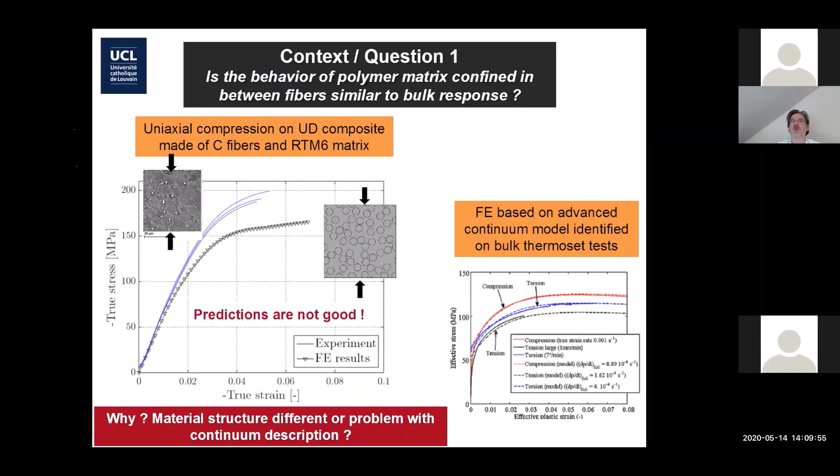The other option is that a continuum model with a classical form is not rich enough to capture the plastic behavior. We're talking about elastoplastic behavior here, and it's not rich enough to capture the detailed flow field at that length scale, in volumes on the order of a few micrometer size. Similar to what we have in metals, by the way, where people develop strain gradient plasticity theory, etc. So two possibilities, and that's one motivation for today.

The second motivation, and for those of you working in the field of modeling polymers, you have seen many papers over the years, starting with the work of Mary Boyce, Eric van der Giessen, Lallit Anand, etc., doing excellent work, relying on empirical phenomenological models but also rooted in some micromechanical analysis and the Argon idea, etc. Over the years the models have been improved and enhanced, and they're doing a very good job. If you read the more recent ones, they can predict a lot of stress states at different temperatures, even sometimes below and above Tg, but at the expense of a very large number of parameters, at least 25 or more.

And this has to do with the complexity of the response of typical thermoplastics and thermosets. Even though I will talk about thermosets, most of what I discuss today is valid for thermoplastics. As you know, a polymer starts with a linear elastic response, then non-linear elastic, then plasticity starting, and we never know exactly where. It's not easy to decide where there is true plasticity, and even the notion of true plasticity is not totally appropriate in polymers. We have to define plasticity with respect to a certain time scale.

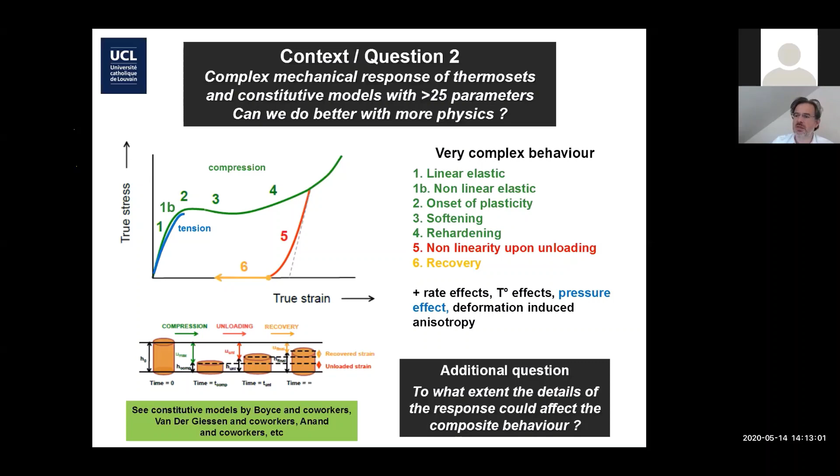People have been looking at that for a long time, but we don't see evidence of advanced micromechanical studies of the phenomena of fracture in thermosets compared to the level of understanding in metals - really fine, low-scale understanding of what causes initiation of fracture and what are the detailed mechanisms. I want to say a few words today about that.

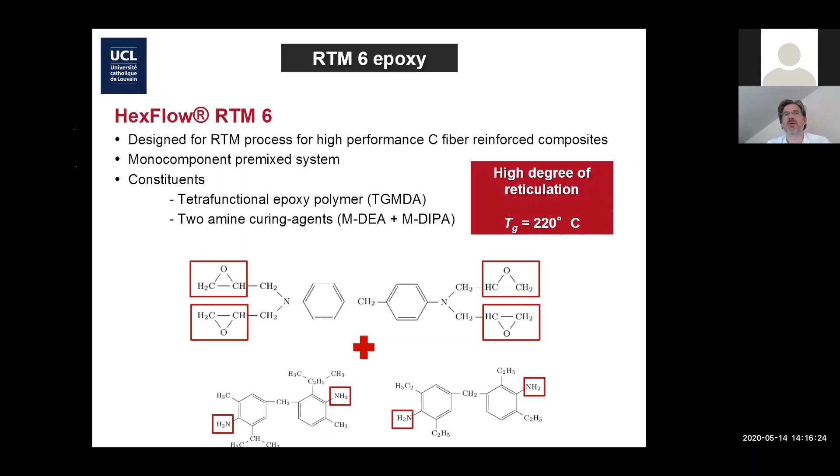In order to apply mechanical models and do micromechanics on the RTM6, of course, we need to produce clean samples. And it's not that easy to produce bulk specimens that are very clean, without porosity, fully cured, no burning, etc.

So it took some time, especially for Xavier Morel, to be able to produce big slabs of material from which we can extract decent size fracture mechanics samples - notch test samples, tensile bars, compression, traction, torsion, shear, Iosipescu type specimens. That was quite a work to define the best curing schedule for that.

By the way, many of the tests I will show today are coming from compression, and I will show a few results on composites, compression of UD composite as well. Compression is nice because this material is not very ductile, and if you want to address the large deformation behavior, you can only reach it in compression.

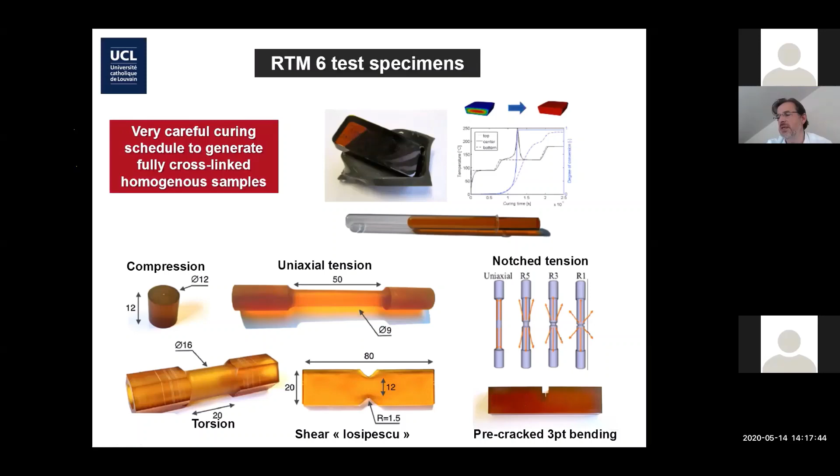So by the way, at room temperature, for the metal people in the audience, it's good to realize that the yield stress of these materials is above 100 megapascals. Compared to a typical aluminium alloy, not the best one, we're not far off. So yield stress is large. Of course, the Young's modulus is close to 3 gigapascal, which is way lower.

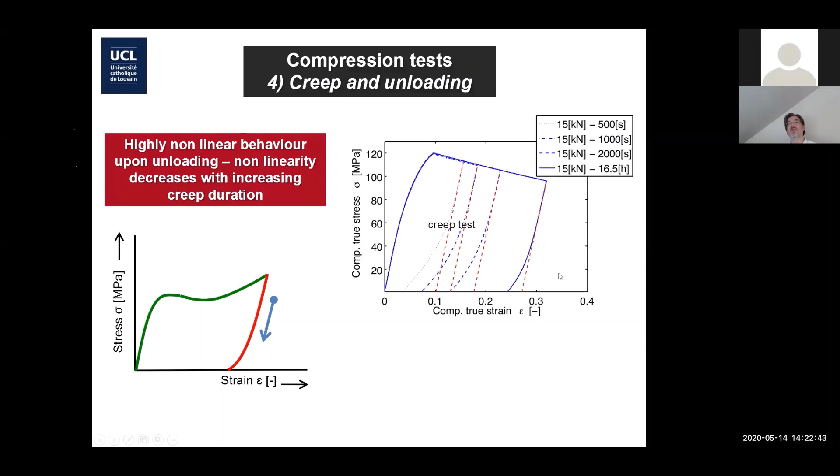Now we're going to let it creep longer, and again unload, and look at the unloading curve. Immediately what you see is that the amount of nonlinearity upon unloading is much lower when you let it creep long. So it's like if by letting the material relax by creep, you do something - we will explain that later - that lets the material stabilize in such a way that during unloading you have less Bauschinger effect, if you want, which will be related later to backstress.

Another very interesting experiment - by the way, we thought that was a really recent thing. We found only a few papers showing this experiment, and then someone came with an old paper, I don't remember, from the 60s or 70s, showing this. So this is not new, and of course a lot of good things have been done in the past. It's also called the Kohlrausch effect, what I will explain here.

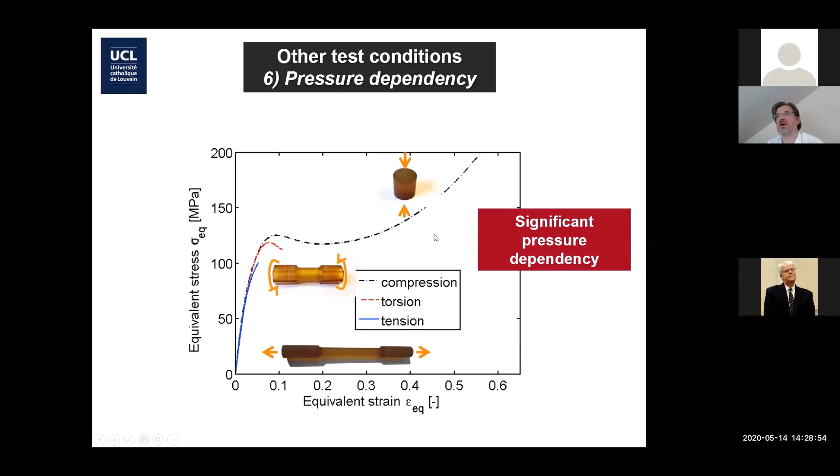Now, typical results known for a very long time on polymers is the effect of the stress state that is applied on the plasticity. So you get a compression curve here, a torsion, and a tensile test. Unfortunately, the tensile test breaks before getting full plasticity, but you clearly see that there is an effect of pressure dependency, which is well known.

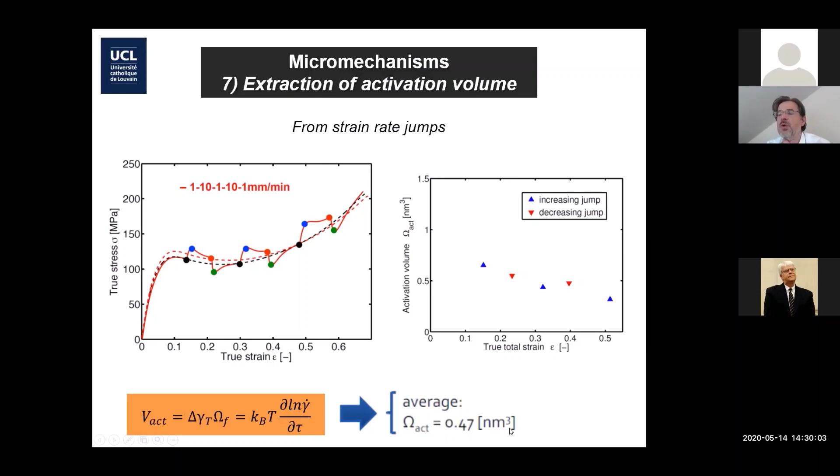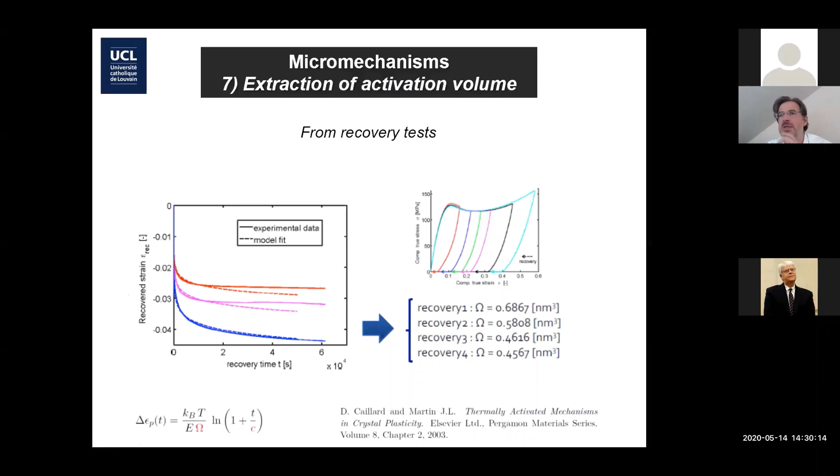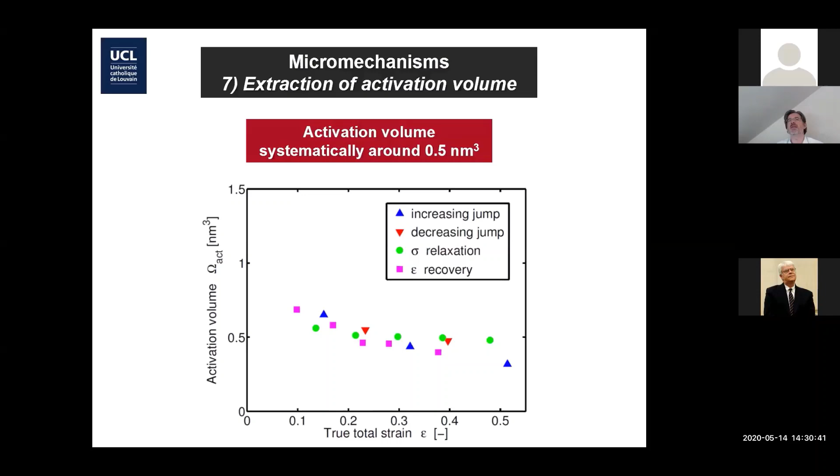There are other ways to measure this quantity through relaxation tests and recovery tests. You have to make some assumptions, but I'll skip that for the sake of time. At the end of the day, when we combine the jump test, relaxation test, recovery test, and perform that at different true total strain, the activation volume we measure changes a little bit with strain, but not very significantly, and is always about 0.5 nanometer cubed, which means there is a phenomenon taking place at that length scale triggering the permanent deformation of the material.

And a final experimental result I'd like to show is the following. These are now tests on composites with aligned fibers - a compression test on a UD composite. The reason I'm showing it is not to look at this nice fracture event, that's not my purpose. The purpose is that we very distinctly see a shear banding process.

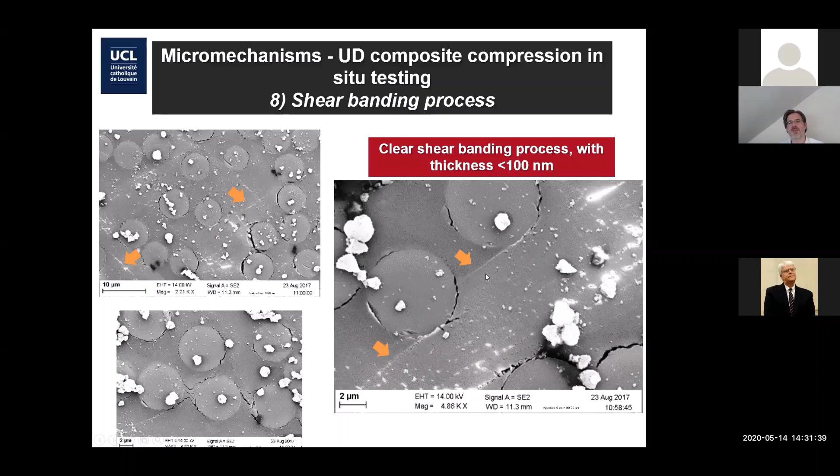You see, and there are many examples of nice shear bands that are observed and which later develop into a damage localization, but at the beginning it's a very distinct shear banding process. We see it very well in this composite configuration. Typical thickness is way below 100 nanometers, but we cannot measure accurately.

There is definitely a shear banding process. So let's go to modeling now. The first thing we did, with Xavier Morelle in his thesis, was to look at available empirical and phenomenological models in order to use this for composites. So then, to make the simulation I mentioned at the beginning, we simulate a UD composite with a nice constitutive model for the matrix and the fibers, turn the crank, and get good predictions. And you know the story - we're not getting very good predictions.

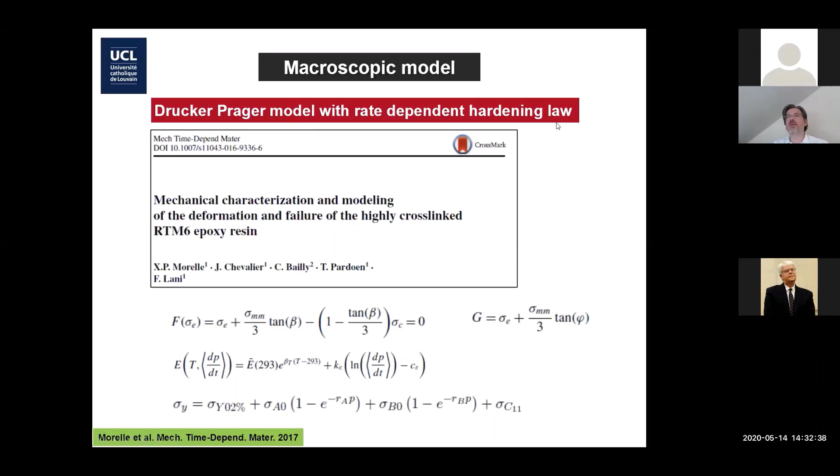So we decided to take a model with an intermediate level of complexity, using Abaqus. We use Drucker-Prager with a rate-dependent hardening law - I'm skipping the details - with 28 parameters. This is typical cost for these types of models, where based on these 28 parameters, you can predict different temperatures, different rates, tension, compression, torsion, and a few more things. These are the 28 parameters.

But we are not able to capture the complicated effect during unloading. We would probably need 10 more parameters for that. So that was the time.

And at that time, we also started working on metallic glasses, a completely different subject. We looked at the literature there, and we read papers by the group of Chris Schuh on metallic glasses, where they use the so-called STZ model, shear transformation zone based model, to represent the behavior of metallic glasses, showing a very good trade-off between complexity and accuracy, or capacity to predict the different phenomena they were observing in metallic glasses.

And we had the idea to say, well, probably in our thermosets, based on what we read from MD simulations also, we could probably use the same formalism. This formalism comes from Ali Argon, who unfortunately passed away a few months ago. In his mind, the idea is that this STZ approach is generic, even for dislocations, or for polymers, or metallic glass. So we decided to look at the work of Chris Schuh and apply it, and see what we should do to convert and modify it to apply to polymers.

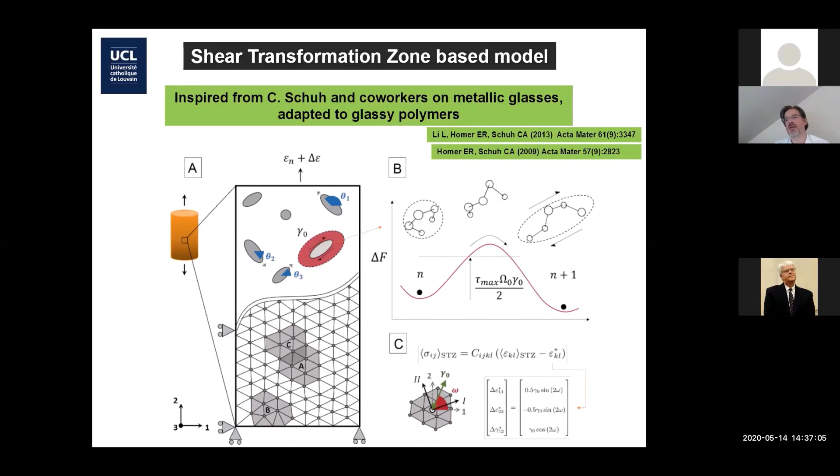A few words about the formalism. The rate of activation of a shear transformation zone is given by this expression, and its derivation you can just follow from transition state theory. The rate of activation depends on the energy barrier, which is reduced by the mechanical driving force you bring if you impose a shear, and this shear will work through the transformation strain over a volume, which is the activation volume I defined earlier.

Now there's a little bit of subtlety. What we found experimentally is not gamma zero. If you take the derivatives, etc., what you find experimentally is the strain multiplied by the true activation volume. But you get the idea.

So there is a certain activation rate, which of course will depend on temperature — higher temperature means higher probability of jumping over the barrier — and this probability also increases if your mechanical driving force increases, meaning if the stress is larger. The probability of activation is the activation rate multiplied by the time increment over which you're looking.

We use a kinetic Monte Carlo algorithm where you generate a random number between 0 and 1, and if this probability is lower than your random number, the STZ is activated. The question is, what is the form of the energy barrier? We just borrow what Argon proposed, and that's what Schuh is also doing.

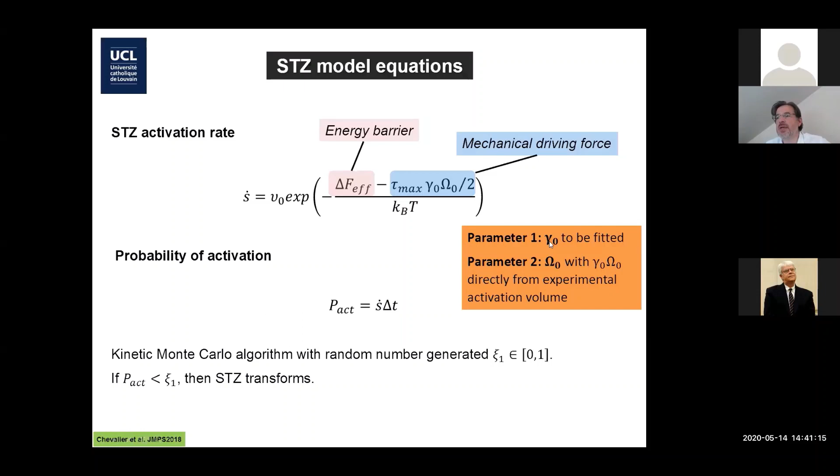So by the way, there are 9 parameters: a shear transformation strain, an activation volume that we can measure experimentally, Young's modulus we can measure, Poisson ratio we can measure, intermolecular resistance - it has a physical meaning, but basically you will need to adjust this value.

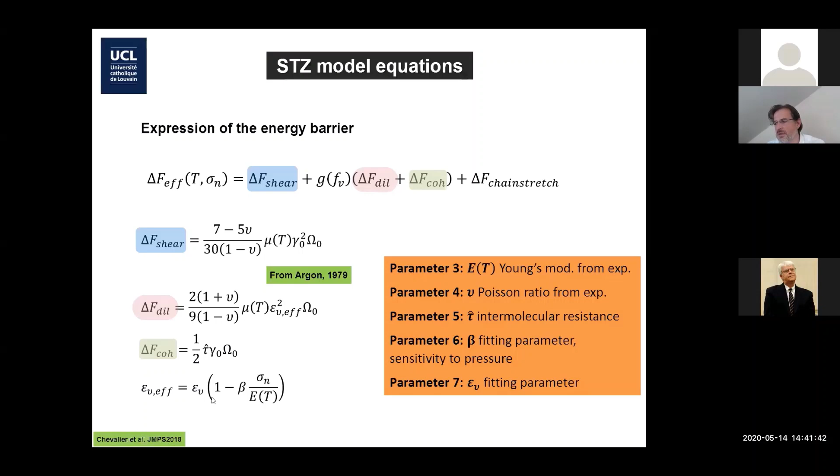A fitting parameter taking into account pressure effect, a fitting parameter connected to the dilatation occurring during a transformation, a fitting parameter related to the annihilation of free volume - but that's not very important - and a parameter to adjust for the chain alignment. So 9 parameters, 3 or 4 of them can be obtained directly from direct measurements.

Okay, so these are some simulations when you just turn the crank, and it seems easy, but there are some subtleties, and Frederick, for the time being, is really spending time trying to regularize some effect of time stepping, etc. So I think now we have a fairly reliable code and version that converges if we decrease the time step, etc.

You see nicely, and the little dots you see - this is maximum principal strain plotted here - and you see the transformation starts, a few STZ, then they trigger some patterns which directly you see are organized under maximum shear.

Now, the goal was to go beyond developing the model. This was to get a qualitative result. We really wanted to push the game to really identify the parameters and make direct comparison to our macroscopic experiments.

So in order to do that, these are the stress strain curves. Here, the experiments are in red, and the model predictions are the dotted lines. When you see me looking like this, it's because I have my camera in the middle of the screen.

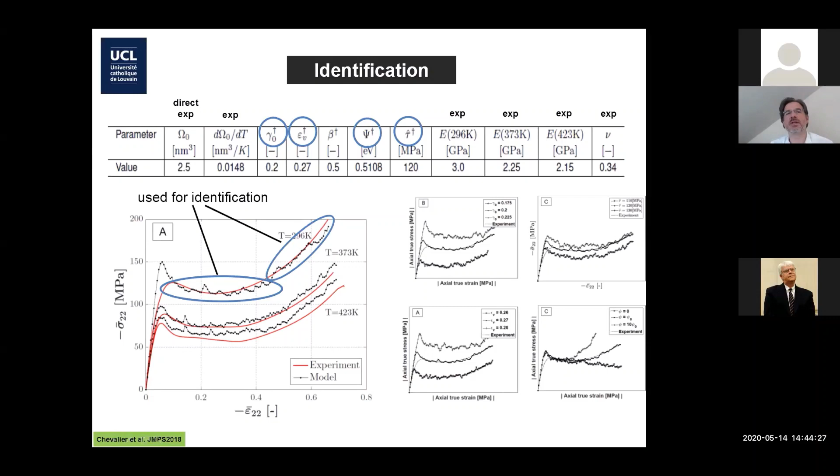So this is just a larger picture where you see the predictions. Okay, you may say that's okay - it's the minimum we expect from a viscoplastic model for polymers, to capture the temperature.

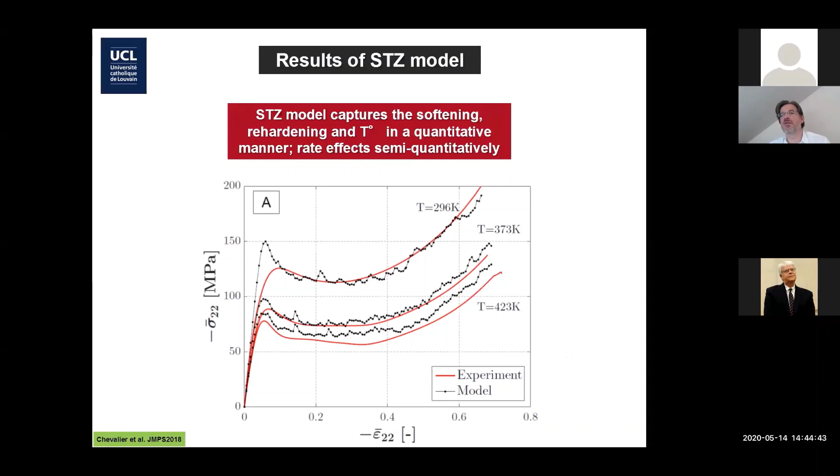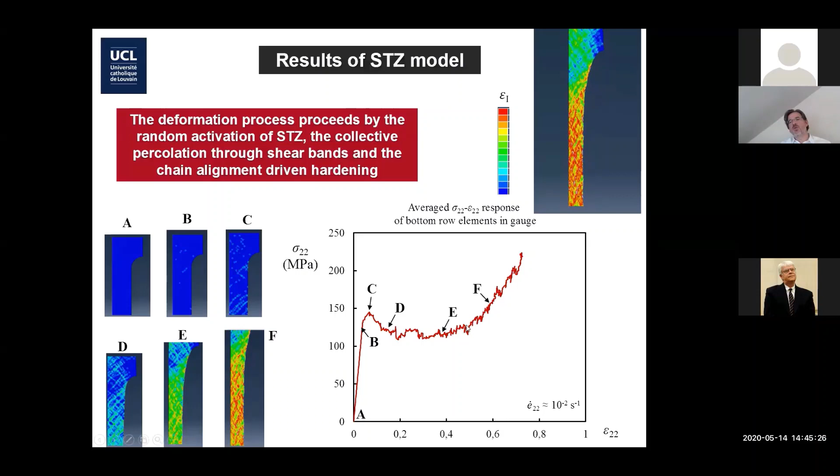These are some more snapshots taken at different deformation steps. This is tension, just to show you that at B here, we start having the first activations below the peak, and the peak stress is when we start percolating some pattern of shear bands, a collective behavior of some STZ, now creating plasticity which go at the macro scale. During the softening, that's when this pattern develops into the entire specimen, and the rehardening starts after 40%.

This is the compression test. It's exactly the same idea. I will skip this one.

Very important messages here, and it's confirmed by MD simulations. Qualitatively, we compared, we looked at some papers in the literature, and MD shows this kind of thing.

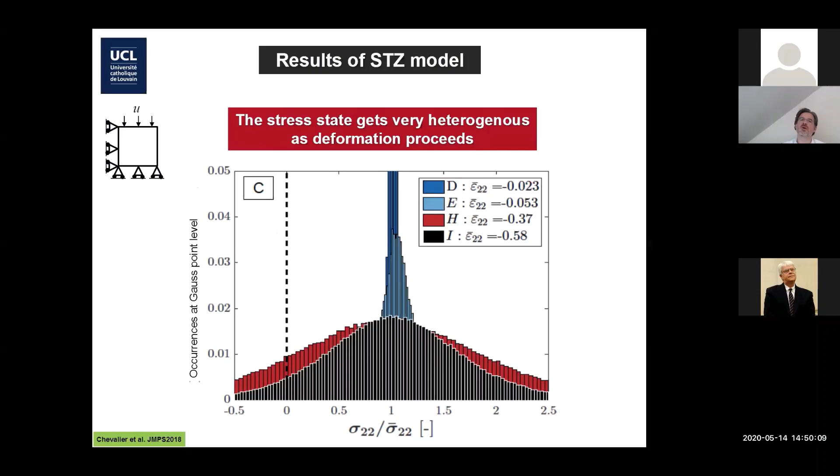Just the fact that when you unload, even under loading, you're already getting regions that are undergoing tension. So as soon as you're unloading, these regions get more and more in tension. They reach the peak stress in tension and start activating plasticity in the reverse direction. And when this mechanism has been exhausted, your stress is still positive, so you get the forward creep.

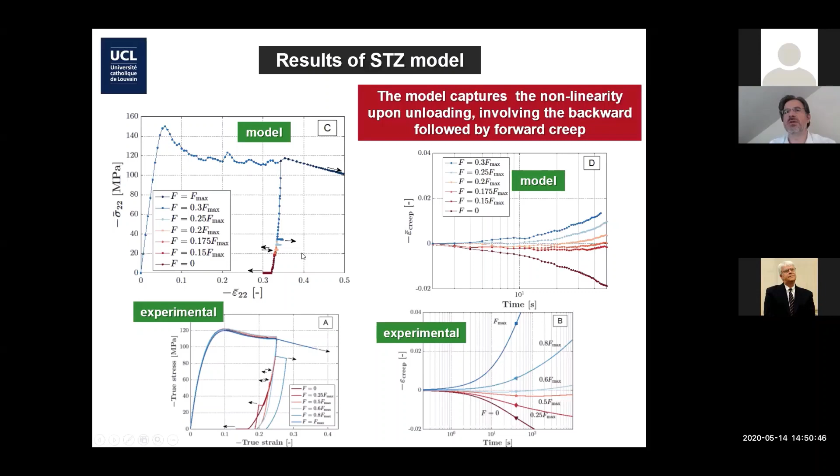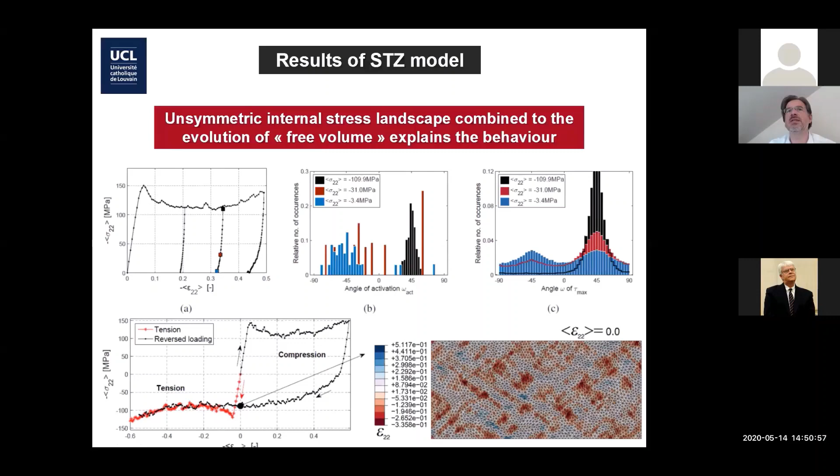This is explained in more detail on this slide, but I will skip it. This is the idea though: it has all to do with the back stress effect. There is nothing else to explain this phenomenon. It is all related to the stress heterogeneities that are created.

So now, just yes. We have 5 more minutes. Is that okay? Yes, sure, thanks. I'm done with this part, and I will just say a few words about fracture, to give people the envy to have a look at the papers. But sure, no, I will respect the time, don't worry. And you know what, I told you my grandmother is turning 100 years old today, so just after the seminar I'm going to go say hi. So I've also reason not to extend it too long.

With the beta parameter, you can introduce pressure effect, but that's not a big deal.

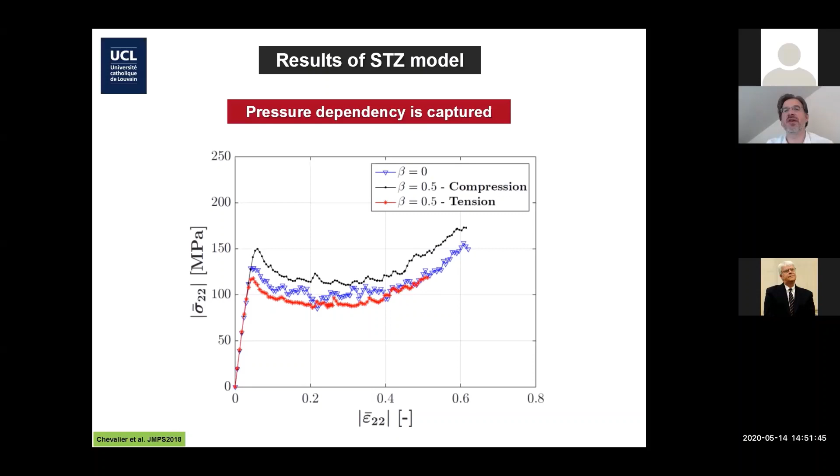The negative message is that we are not seeing much strengthening coming from this model when it's confined in small volumes. As a matter of fact, we don't get, like in these locations, far field long range effects which accumulate and which can create the strengthening. So there's still something to understand there. And I'm not saying that with this STZ model we're solving all the problems, by far.

A few minutes to show you some pictures about fracture, and I just want to give you some experimental motivation. Regarding the models, I will just let you read the papers if you are interested. But we performed tests on notch specimens, shear specimens, and compression specimens on RTM6.

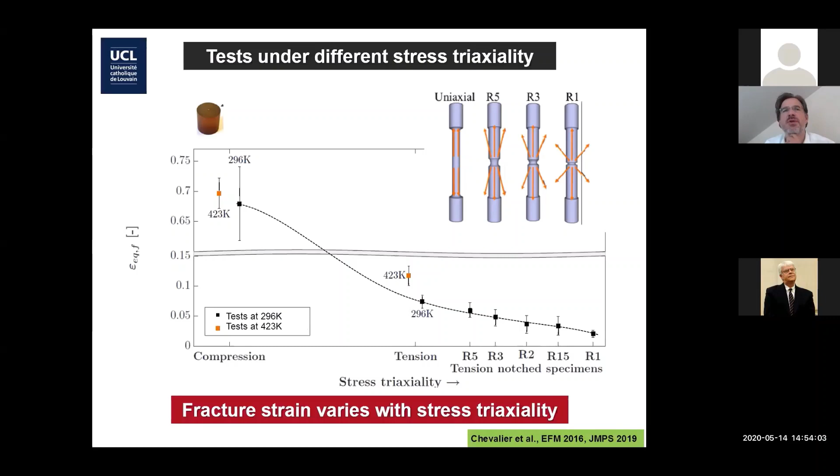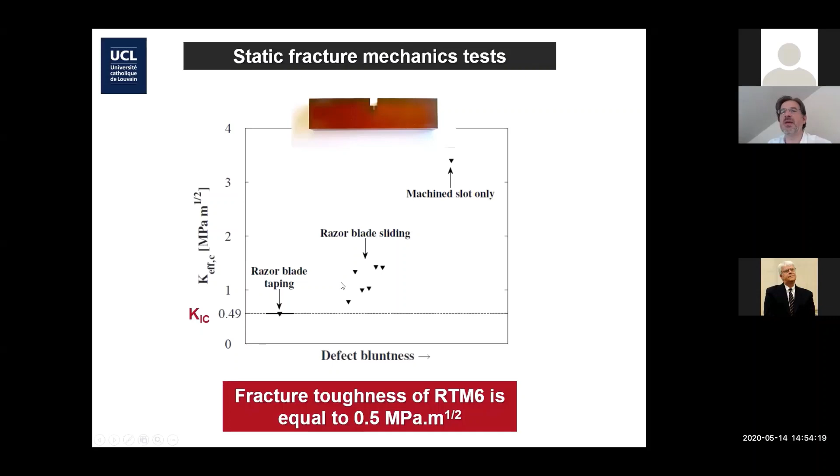We measure carefully the fracture toughness, and it's known in the polymer field that you have to be very careful in the way you introduce the pre-crack. If you just use razor blade sliding and not taping, you measure a fracture toughness that is, on average, twice the value of the real one. So be very careful.

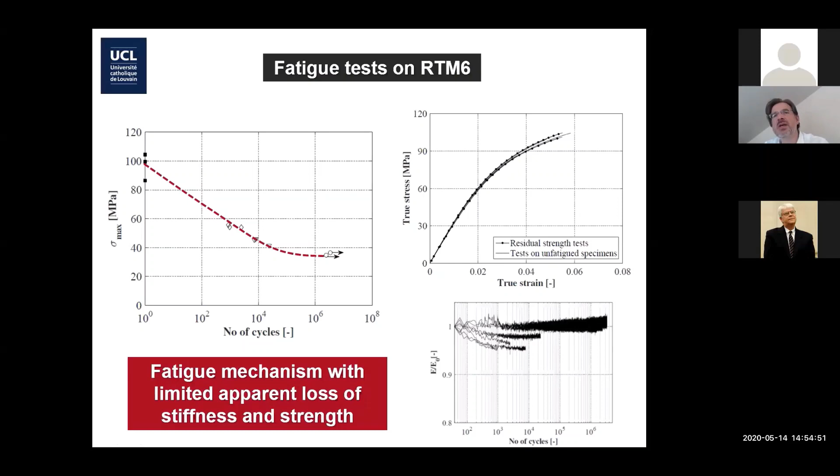We perform fatigue tests, and the main message here is that if you do a tensile test after a long fatigue, you don't see much difference in the response. So fatigue is not leading to a lot of reduction of stiffness or strength. It's only at the very end that you're generating defects and the material breaks. So the incubation time is very long.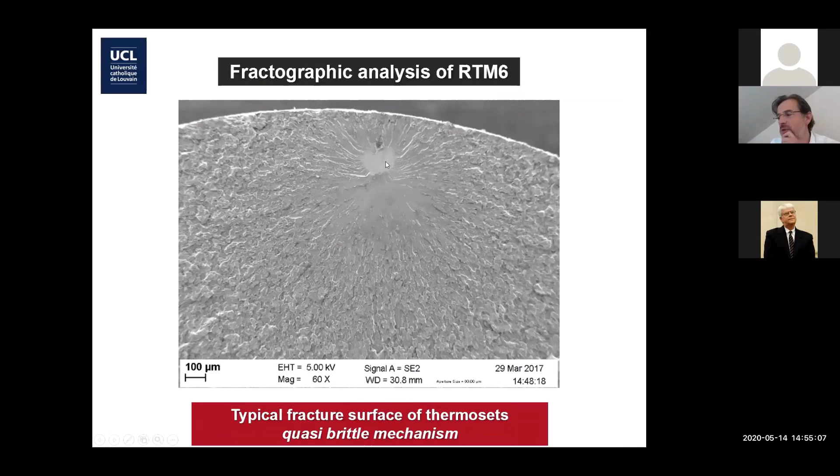I will finish by showing you some nice micrographs, fractography. This is RTM6 broken, and this is when you zoom in on the initiation zone. It's fairly interesting to see that you have a sort of defect - the defect is here, the defect is here, the defect is here. By the way, this is for fatigue and uniaxial tension, and we see a very similar pattern in fatigue and uniaxial tension.

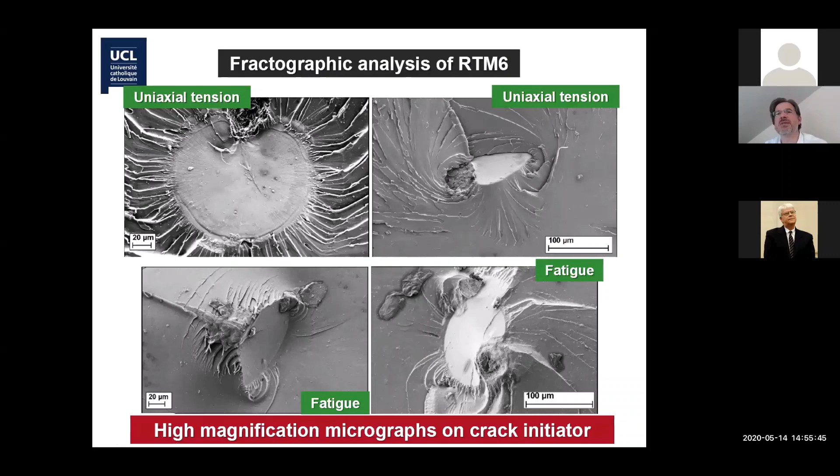Around the defect you have a flat region, a mirror-like region, and then a small, I don't know if you can see it, very narrow rim of 2-3 microns. Then you get the brittle failure pattern with the river lines. If we zoom in along this flat plateau, and I'm looking below here, you see this plastic zone - we think it's a plastic zone, and we have reason to believe so.

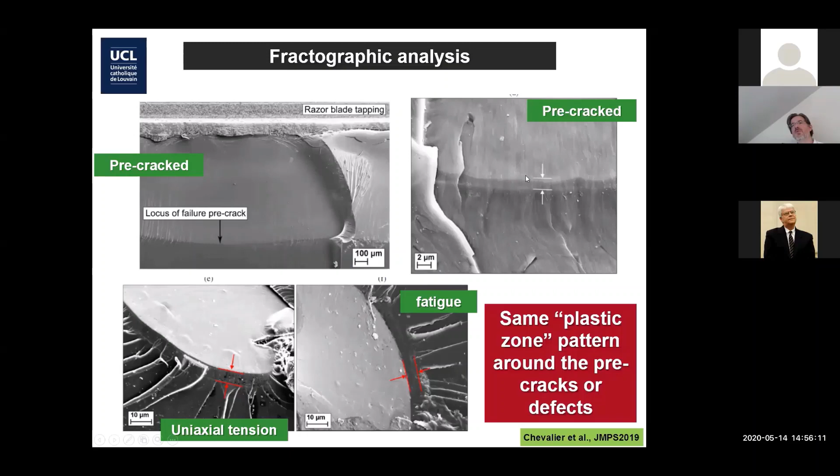It has the size it should have for a plastic zone based on the fracture toughness. You see this zone. If you put a pre-crack, a very sharp pre-crack, we don't see the flat zone. Basically, we only see the plastic zone. It's like if the pre-crack is sharp enough to play the role of this flat zone.

So the message we got from analysis of the fracture surfaces is the following. For a specimen without a pre-crack, let's say start with a pre-crack here on the right. If you start with a pre-crack, you load the specimen, you get blunting, a little bit of blunting, you get a plastic zone of about a few micrometers, in agreement with what you expect, and then the crack propagates.

If you start with a smooth specimen or a notch specimen, anything with no real pre-crack, there are always some tiny defects in the material. There is a nucleation process, something around the defect. There is this fast crack, which stops. There is a crack arrest. And then there is a reloading phase, a little bit of plasticity, and then crack propagation.

This is what we observe, and now we have looked at other thermosets, and we do see the same. We don't understand why the crack arrest happens exactly. What is the condition for the crack arrest and the reloading? All the numbers, all what you see makes sense when we compare them, but it's still a bit unclear for us.

What exactly sets the size of this first nucleation, then the stop, etc. But we found that interesting.

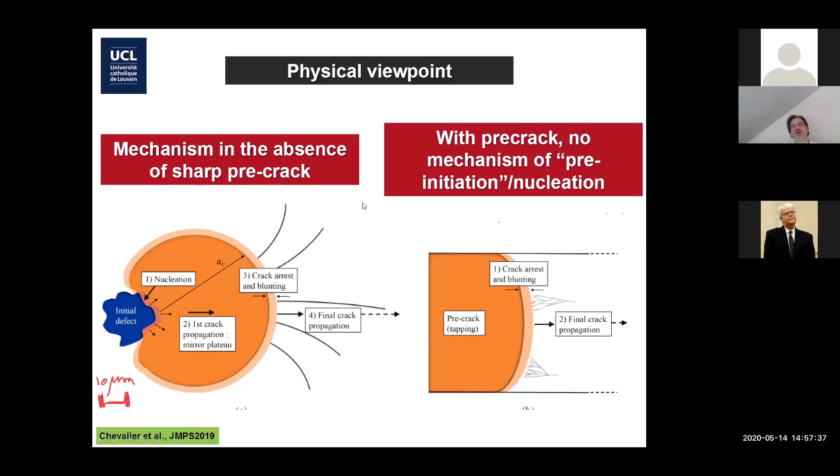The last 4-5 slides that I will skip show you the model that we have developed, and there is a simple model to predict this effect just based on 2 parameters: an aspect ratio of defect and a critical stress of about 300 megapascals, which can be used to rationalize the notch test, tensile test, the compression test, also to predict the compression.

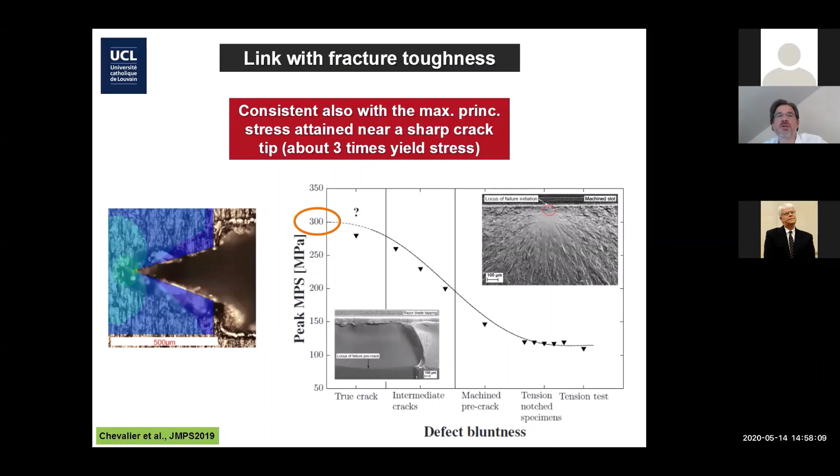As well as the fracture toughness specimen. All right, I'm going to go to the conclusion, not to be too late. I've been a little late, not long, and we had this bad stop in the middle.

This is the conclusion for the viscoplastic behavior. You have seen that the behavior of thermosets depends a lot on the heterogeneous nature of the deformation, even more than on metals, for those of you who are more from the metallic field.

The STZ model that I've explained is very efficient. With 5 plus 4 parameters, we can capture a lot of things. Of course, we cannot use it for a structural simulation. I've not said this, but the size of the STZ is nanometers. So we can simulate regions of micrometers, not millimeters.

So basically, you should see this model as interesting for science, for looking at small scale effects, and you can use it to fine-tune continuum models that will still dominate if we want to model more structural engineering or bigger problems. And I have explained a few things about the failure process, and this is not typical only of RTM6.

Recently we looked at other thermosets and we found the same scenario. We propose a micromechanical model for that, but still there are several unknowns, very interesting to understand. And I would be happy to know if some of you have more ideas about it. And I thank you, all of you, for your attention.

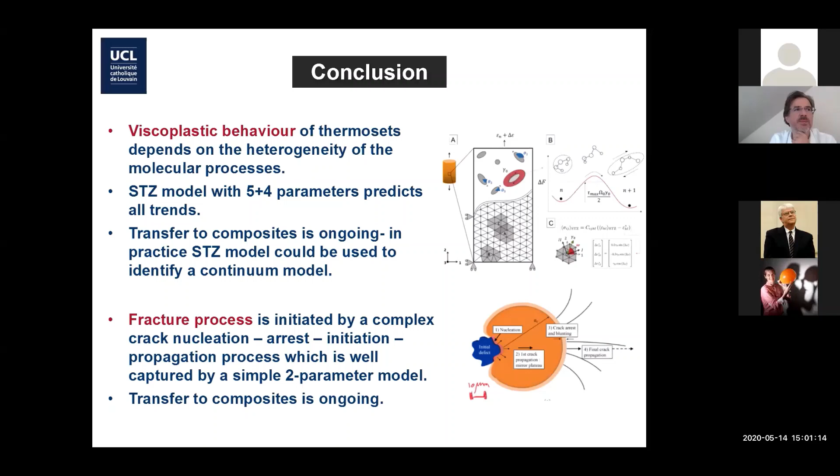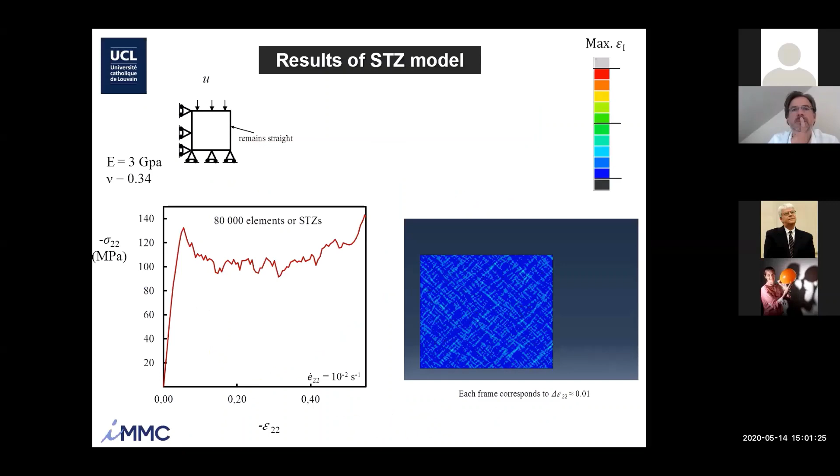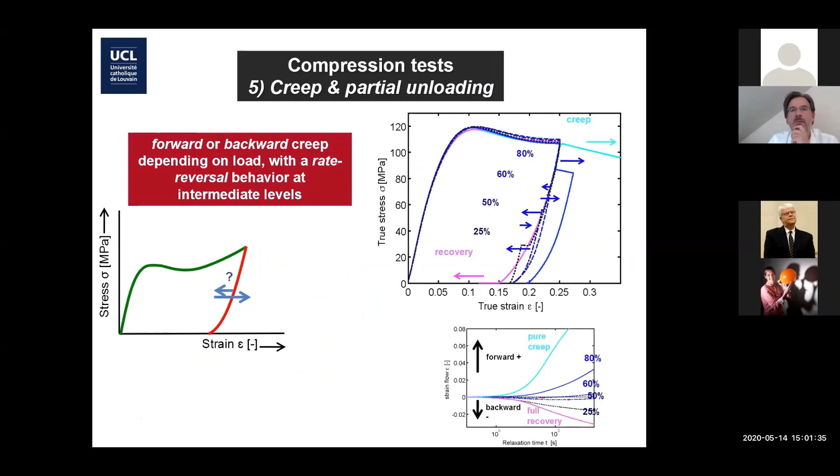And second, there are some models now that have been developed, for example, by Professor Nguyen at Johns Hopkins University, and some others have followed the same path, using all we know in terms of the fact that for thermosets, linear viscoelasticity extends to large deformation.

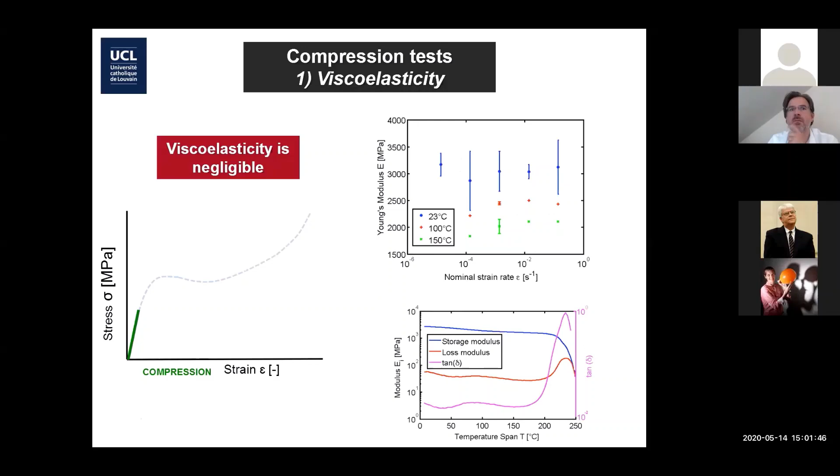And I would like to know, we can discuss this. And yeah. Okay.

So you understood, I'm initially not from the polymer world. Well, I did some work during my postdoc more than 20 years ago, but then my main field was metal. So I think it's a very interesting subject and with no good answers.

For a long time, when I was talking with my colleague, Christian Bailly, he said, Thomas, what you call viscoplasticity is just nonlinear viscoelasticity. Let's agree, we have different terminologies, etc.

At the end of the day, I'm not really sure anymore what to do. Because if you look at these graphs here, you load by 50%, you unload, and you wait for 1 year, you still have a permanent strain. And in the vocabulary of plasticity, this is called plastic strain. And I think 100 years later, you will still maintain some strain.

So the fact that you recover due to higher temperature proves that it's just a matter of relaxation times. Yes, exactly. So at the end of the day, I think it's just a matter of vocabulary.

If you want to correlate nonlinear viscoelasticity with enormous relaxation time, for me, it doesn't change much, especially now we're working with this STZ model, not anymore invoking yield stress function, etc. So it's worrying me a little more when we start talking about yield surface and then mixed with viscoelasticity. Then this is theoretically more complicated. But I agree with you.

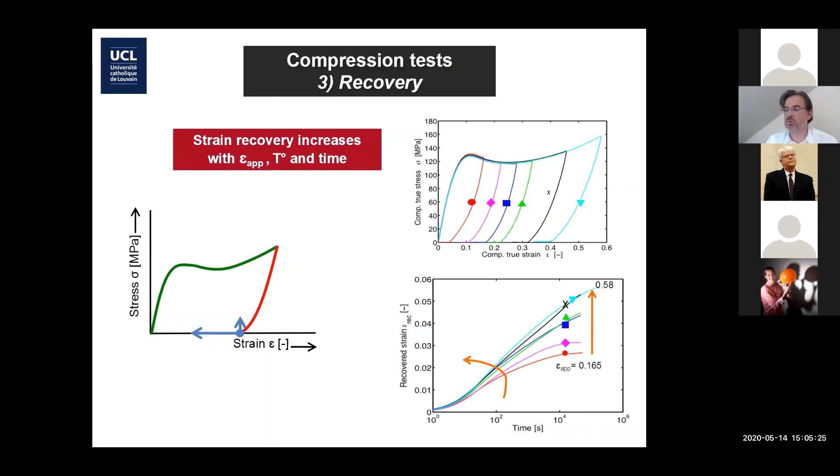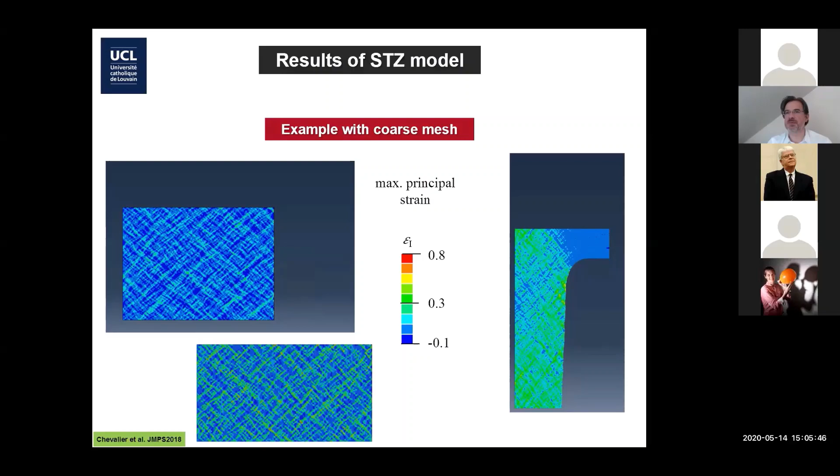I've got this question since the beginning of your seminar. How can you afford to have such a big and complex model within finite element computation? You've answered a little bit these questions at the end, saying that you could only simulate structures of roughly micrometer size. But this is applied to composites, and I assume it's interesting to also model both fibers and matrix. How can you combine these? Can you give us some insight on this?

Yes, and I would say even more. This is 2D, huh? So we're working on a 3D version of the code, and then it will be even more complicated to do something realistic at scales beyond a few micrometers. So I certainly agree with you. Basically, this is the scale of a model that we can treat with finite elements. So 3 fibers.

But what I said at the end is that you can use this model for 2 things. Understand better what's going on at that length scale, over time scales that are much longer than MD simulations. You can look at the mechanics here. You can do nano indentation, things like that, very carefully. Understand what are the possible size effects, for instance.

Do compare to micromechanical tests. We have made comparison with DIC measurements during this in situ compression test, but nothing more. I agree with you. So basically, you can use such a low scale model perhaps to fine tune another constitutive model, which would be a classical constitutive model to make predictions at a higher length scale. So my point is absolutely not to say that this is the model and now you can forget the rest.